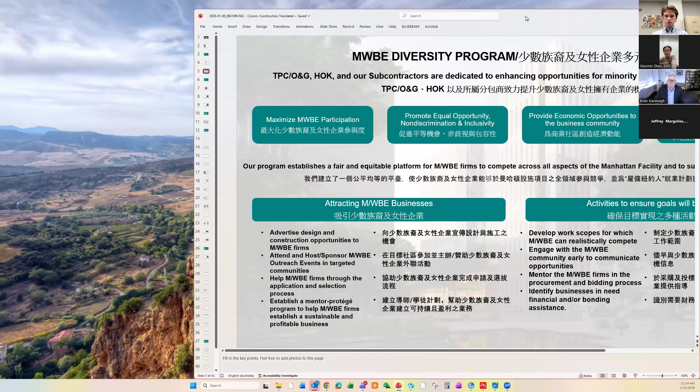George, are you sharing your screen? Because I'm just seeing you, I'm not seeing a presentation. Sorry, really? Let's try again. Can you see my screen now? Nope, still just the webcam. Apologies here. Sorry about that. How about now? Is that better? I think it's coming through. Yes, that's better, all right. Can you make it full screen? There we go, okay, sorry, we can see it now.

So here's just a summary of our MWBE diversity program. Moving on to really the project site and explaining all about that.

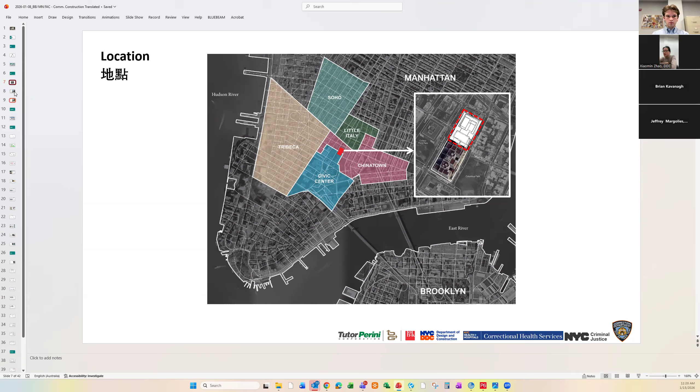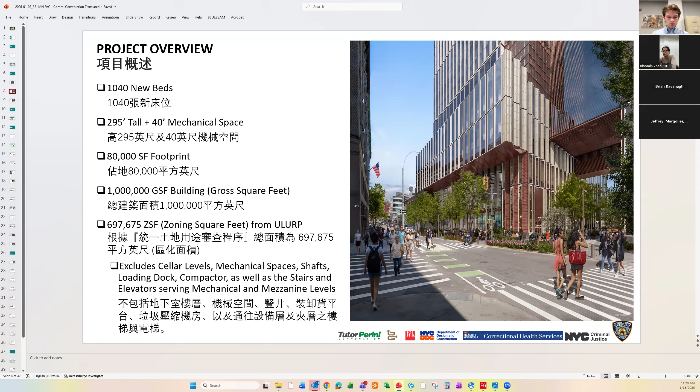Everybody's aware of the location, right in the center of Chinatown and the Civic Center. You can see here a highlight of the plan view of the site. The project is 1,040 new beds, very similar to the other facilities in the other boroughs. It's about 295 feet tall with some space in the mechanical floors above. We're looking at about an 80,000 square foot footprint and a total of 1 million square feet. When we look at the ULURP zoning square foot, it's about 697,000 square feet. There's a structural steel framing and concrete core that houses the elevators with concrete slabs on the metal deck, and the envelope is made up of a curtain wall system. We'll get into more detail in a little bit.

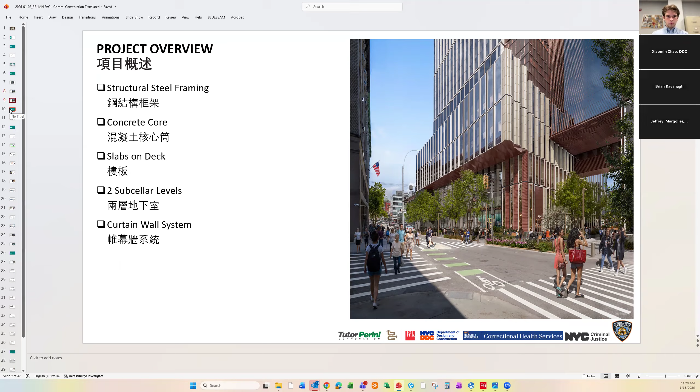Looking at the schedule, overall the project is about 7 years from our notice to proceed, which we received in May of 2025. We mobilized on site around mid-December. You might have noticed we adjusted our fence line and started setting up our site logistics.

Right now, through early spring, we're preparing the site for SOE, support of excavation, and you'll see some miscellaneous activities such as dismantling or demoing some of the abandoned foundation elements. That work will really start in the next couple of months. The real operational work will start in Q2 of 26, where you'll see the drilling of the SOE system. The SOE spans for a little bit over 2 years until our foundation starts in 2028, followed by our steel erection and the rest of the building fit out.

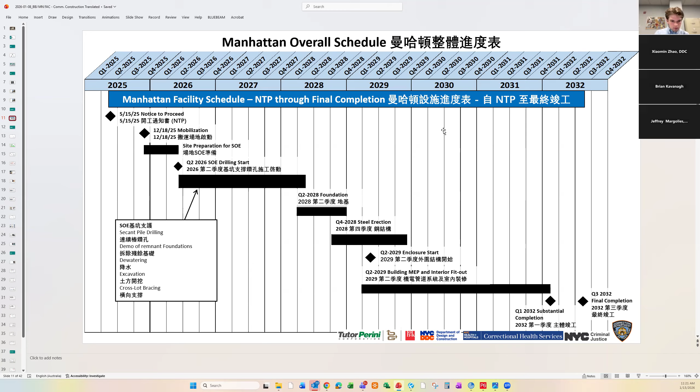Let's look at the phase construction periods. Our first period ended in December. We were exploring the site, validating what's existing there, what was left over from the previous dismantling project. We conducted geotechnical borings, environmental testing, looked at utilities. All that work is still ongoing, and we should be wrapping it up very shortly.

Also, you might have seen Con Ed really start to get very busy around the neighborhood to support us with our operations as we want to start SOE in the spring.

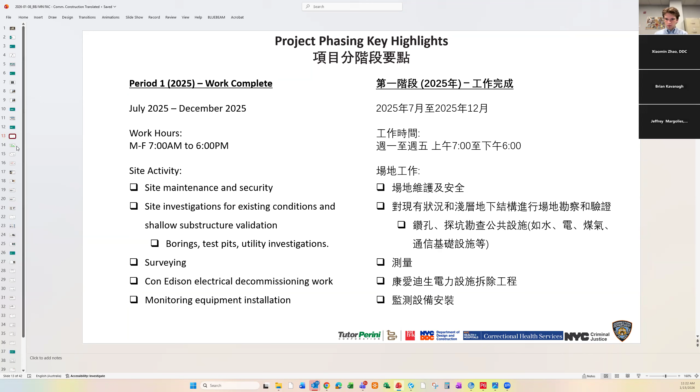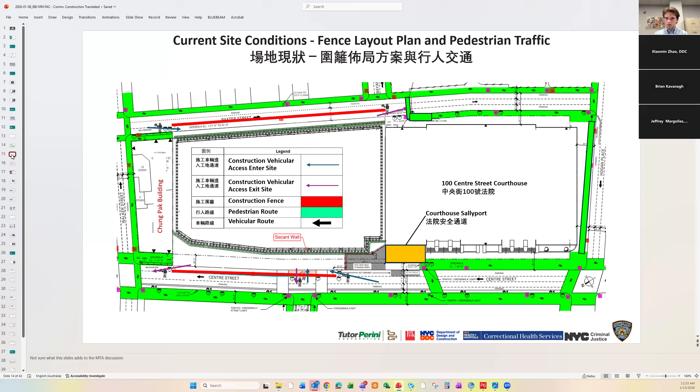All right, period 2. This is starting in about a month. It's going all the way through Q4 of 2028. This will include SOE, support of excavation - I'll walk you through in detail what that will entail. It will include the mat foundation of the subcellar and the subcellar walls, and the start of steel. We'll start to see actual vertical movement in Q4 of 2028.

It's important to note here the work hours. We are showing 6 a.m. to midnight. Keep in mind the first hour is really a phased start to start bringing in the workforce and setting up the site, doing toolbox talks, and starting deliveries. So really the operational work will start about 7 a.m. On the tail end, the midnight hour, I know this is an outstanding time, but really in the last 1 or 2 hours, it's going to be winding down - demobilizing, securing the site, making sure if there's weather events, everything is secured.

Also, the after-hour variance after 6 p.m. should start on or about May or June of 2026, and that will start being implemented throughout the summer with our drilling operations. Now, the schedule is a very tight and accelerated schedule, which is why we need to really work on these hours. There are certain activities that can occur during the day and others that will occur in the evening. Activities such as drilling and heavy concrete operations will be happening during the day, some of which may go into the early evening, especially concrete, but really the drilling should be focusing during the day.

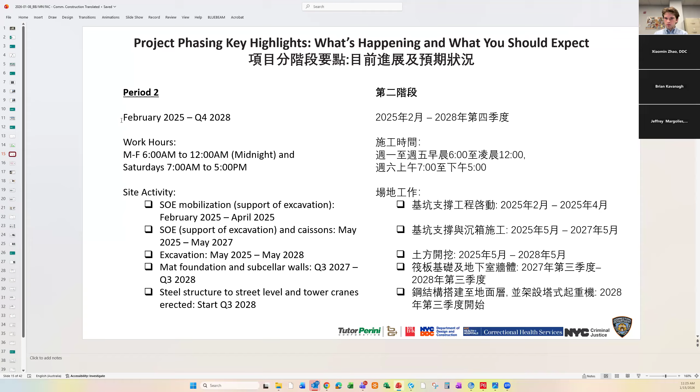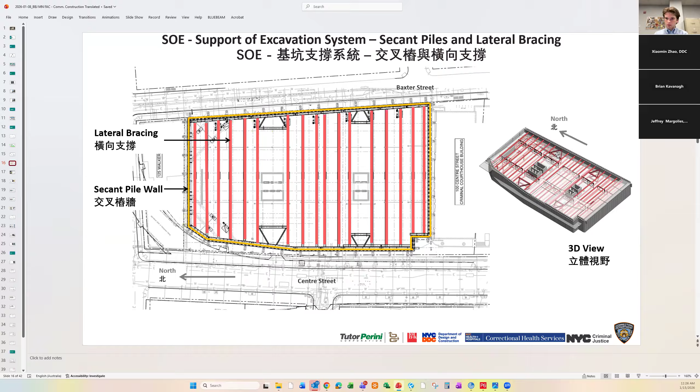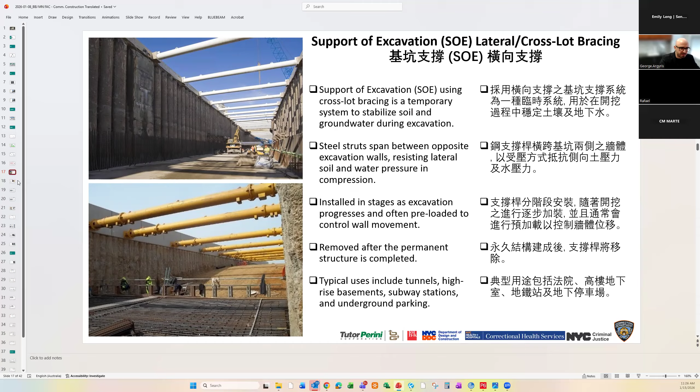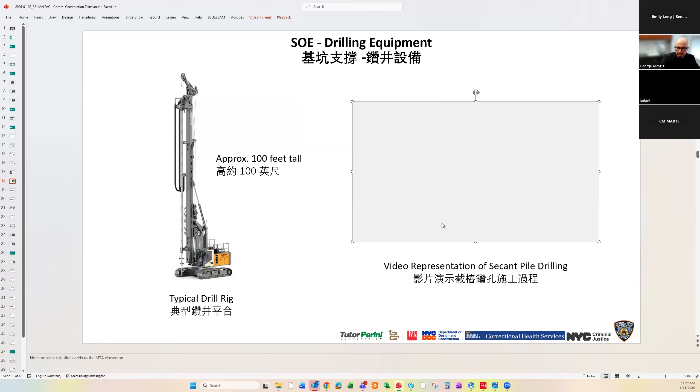You can see here the drill rig that will be used for this type of operation is approximately 100 feet tall. We are working with our drilling subcontractor to identify how many of these rigs will be on site. Here is a short video, which I'll walk you through, of what that operation will look like.

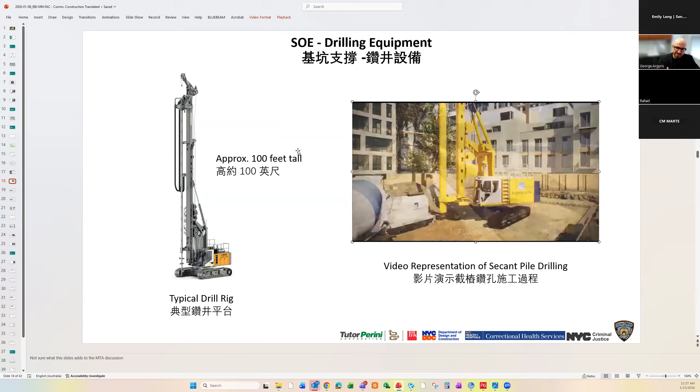So you can see here the equipment is brought onto site. The first step is to make a trench on the site to get our guide wall, or starter wall, going. This is a channel that enables the secant piles to be guided through the earth as they're being drilled.

You can see here the drill rig comes in after the guide wall is in place, and we drill down. You can see here the overlap. Let me fast forward a little bit. Here you go, so this is the operation. These piles are drilled in, they're filled with concrete and steel, and they overlap, and this creates a barrier from the exterior of the site.

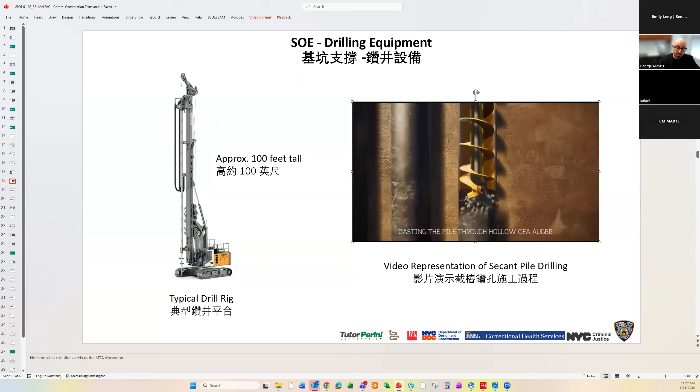And this is going to help us control the water, which I'll explain in the next slide. You can see that's going around all the way around the perimeter.

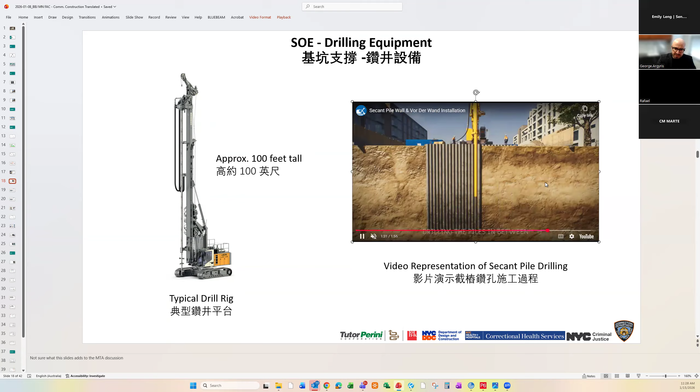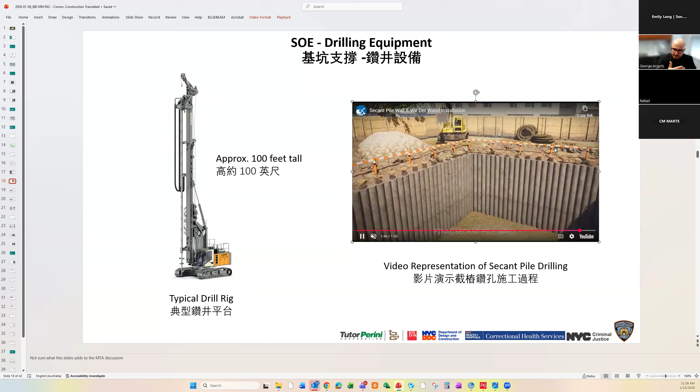Just want to be cautious of the time here. The only difference from what you're seeing on screen is that we're going to be going all the way down to bedrock to secure against the water table on the perimeter. And here's the final product - it's basically a wall with a cylindrical shape. And at the end, it looks something like this in concept.

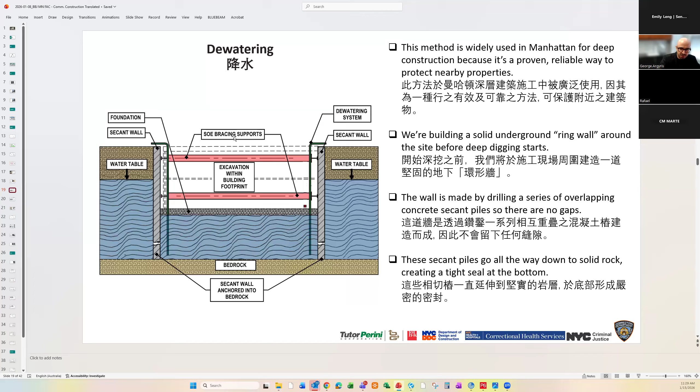And once we get deep enough and we install this cross-lot bracing, we then place the foundation. Now this cross-lot bracing is in place until we are able to secure these walls with the cellar floors, which will create enough support to remove these systems and continue with our building construction. This is another slide just explaining how this operation is done.

Now, during this dewatering operation, we're going to have wells all throughout the site to monitor the water table level. You can see here, this is the normal water table, and we're drawing down from there. The excavation is about 30 to 40 feet, depending on where you are on site. And this is how this will look like in concept.

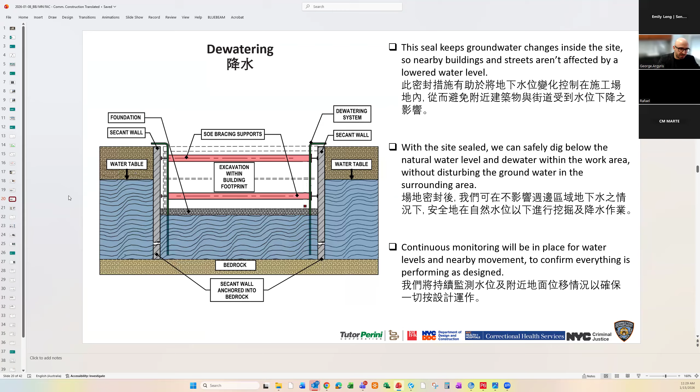This is some examples of the type of equipment you'll see on site. You'll see some cranes, concrete pumping equipment, concrete trucks. You'll see here some of these casings that go into the secant piles.

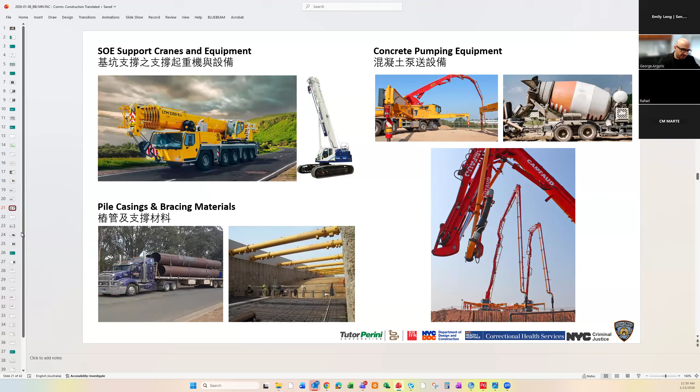Now, period 3 starts at the end of 2028. This is when we really start to go vertical above the street level. You'll see steel erection going up, you'll see concrete elevator cores going up.

The work hours stay the same, and the concept in terms of how we start the day and end our day is the same. We're going to ramp up in the morning with our workforce and ramp down towards the tail end of that time period. Saturdays are going to be an option in case we get a lot of weather impacts, or we have to make up work or continue some miscellaneous activities on Saturdays.

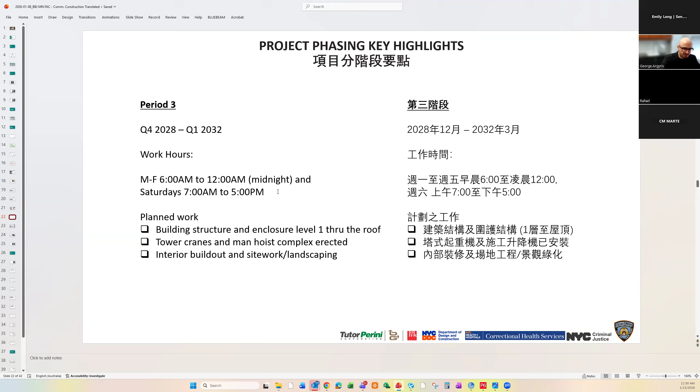Here are some examples of the vertical structure. This is what an elevator core looks like. This leads the structure, it goes up ahead of the steel erection, which you can see here are some examples. Here are some tower cranes that are going to be similar to what we will be utilizing, and of course, our hoists.

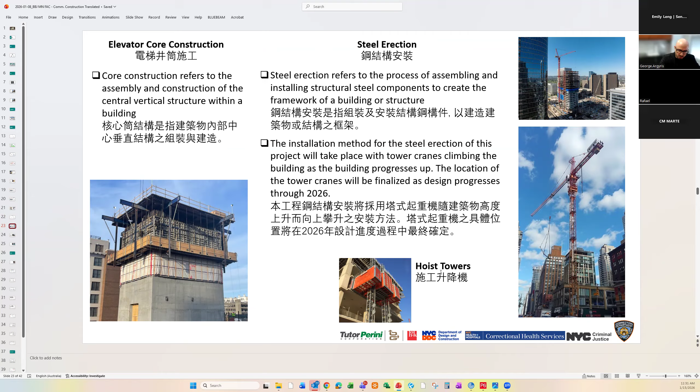All right, the curtain wall system is basically the skin of the building. And this protects the building from moisture, wind, and all the environmental elements. It also helps keep a certain level of efficiency within the building in terms of thermal parameters - how much heat is let in and out, and how much cool air is let in and out.

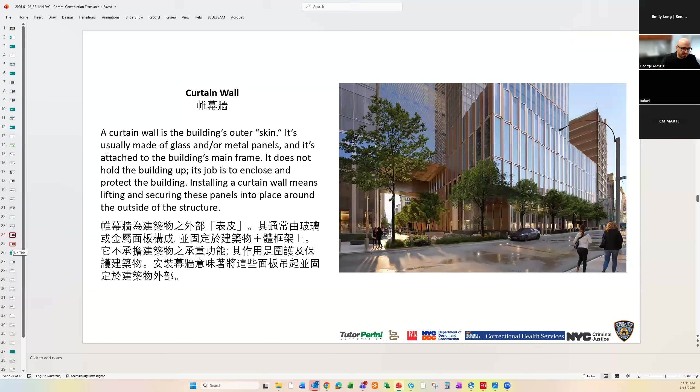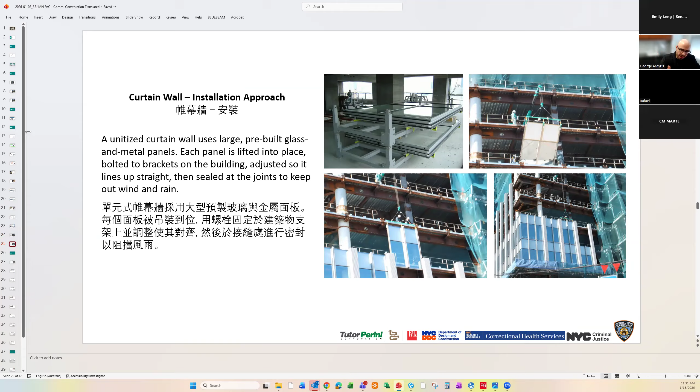This is a type of operation that we'll be doing. We'll bring the panels inside the building. We will hoist them out with either a crane, a tower crane, or a small crane placed a few floors above, and we'll place these panels into their permanent location, very similar to what you see throughout the city.